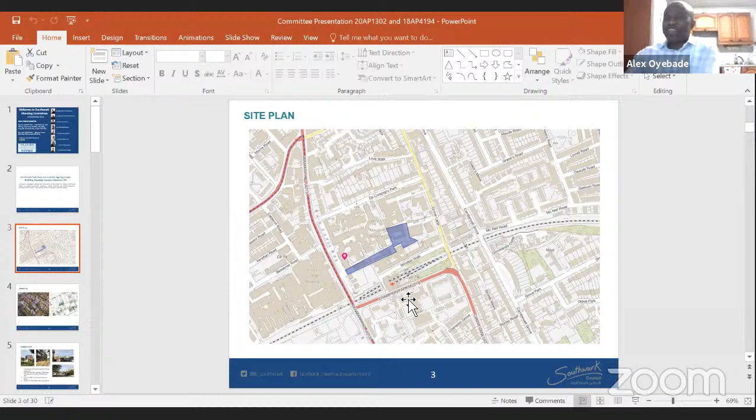So basically, from Denmark Hill, if you look towards the southwest end of the site, that's where the car parking area is. On the bottom left, below this building, is where the existing car parking area is, and that will represent the holding area for the vehicles that will service this site. Once they are called upon, they will deliver to the site there.

Then they will go through Windsor Walk to the right, to the east, and then turn left on Grove Lane. In the middle there, before they hit De Crespigny Park, there's a middle point where they will turn left.

Onto the side between the school and the existing hospital building, they will turn left there, westwards, from Grove Lane, and then go through the internal route of the site north to exit onto De Crespigny Park, and then turn left onto Denmark Hill again, and leave the site from there.

Okay, thank you, that's much clearer now, much clearer. Thank you very much indeed.

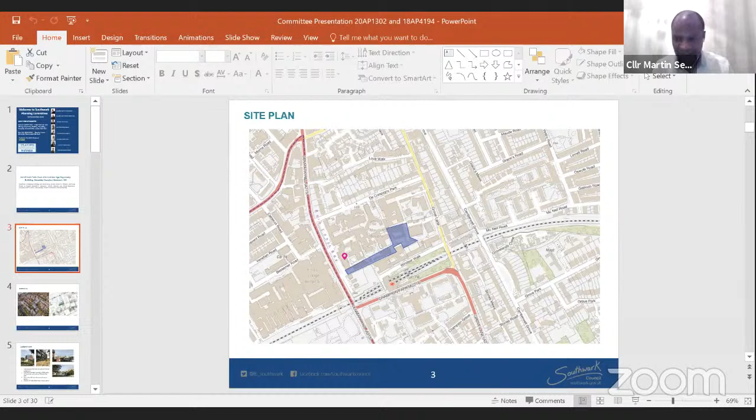Councillor Whittam, is that clearer? Yes, so there won't be any backing and three-point turning.

And is the school going to be hoarded off? Is there going to be a hoarding separating the school from the building site? Yes, Councillor, the building site will be hoarded off, so basically they have a dedicated pedestrian route on the eastern side of the route anyway.

So the construction site will be hoarded off, so they wouldn't have any contact with the school at all - it'll be completely separated. Okay, thank you very much indeed, Councillor Britton, for your question.

Are there other members with questions? I believe that question and answer session, Councillor Burgess, if you're still there, I can see you - responds directly to your concerns.

Would you agree? Sort of, yes and... No, I feel like it would be good to really see the detail on the traffic management plan that has been accepted, and it would be really useful to understand if there are any constraints around delivery times, so that all of that construction piece is really managed and rationalised in the most tight way possible.

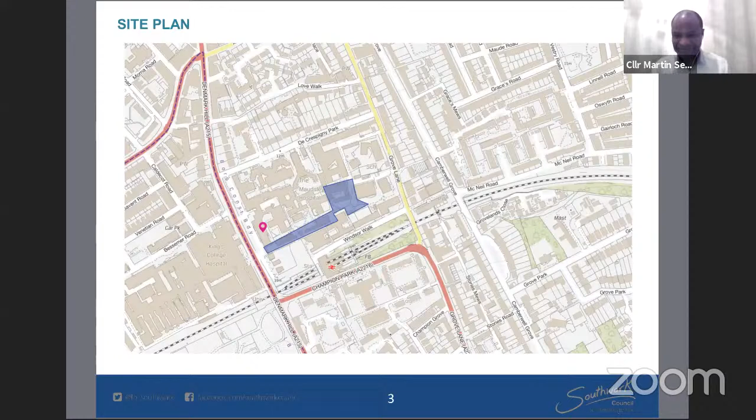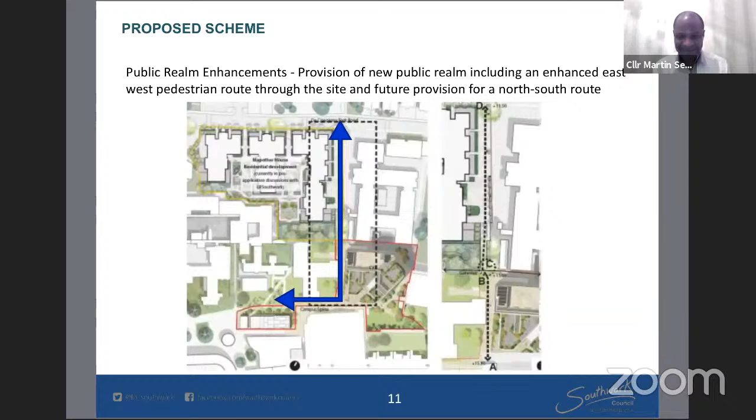And I suspect you have a plan B, of course. Do I have a plan B? Oh, I find in life it always helps. Oh, my iPad. Ah, it's going to work. Righty. I share your... oh, there you are. It has worked. There you are. There you go. Okay, just... There's always a slight delay. Oh, there we go. There you are.

First of all, I would like to draw members' attention to the addendum matters in respect of this item. It's noted that two further letters were received following publication of the reports. There are some clarifications and corrections to the reports, including the provision of additional conditions.

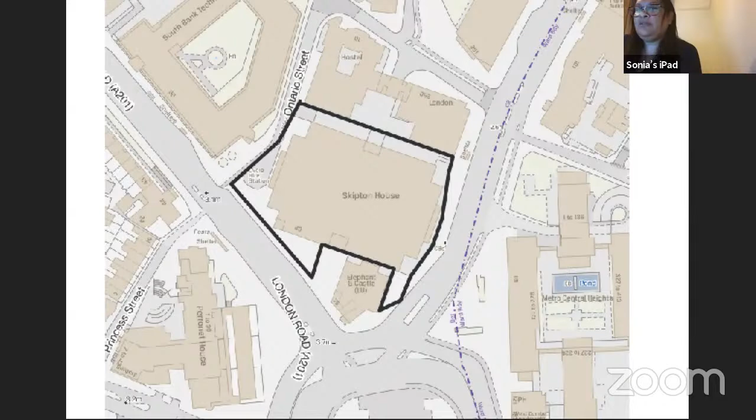The building is located in the centre of Elephant and Castle Central Activities Zone, north of pedestrianised Elephant Square. The site is situated immediately to the rear of the Elephant and Castle Bakerloo Line Underground Station, fronting London Road to the southwest, Ontario Street to the west, and Newington Causeway to the east. Immediately to the rear of the existing building and adjacent to the north boundary is the Perry Library, and beyond it the newly constructed 251 Southwark Bridge Road, former Eileen House.

The current building is a modern early 1990s, six-storey plus office block, currently occupied by the NHS, who have a lease arrangement which expires in December 2021. The site is in a highly accessible public transport zone and is in PTAL 6.

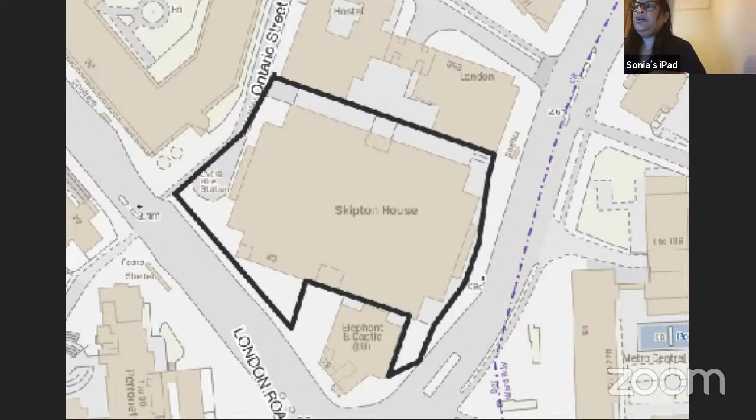The proposal is for the provision of six additional storeys as well as the part demolition and recladding of the existing building, to provide a gym, shops and central atrium entrance to the ground floor, with office space on the upper floors.

The proposed development would result in an uplift of 21,375 square metres of office floor space, with a total provision of 41,625 square metres, as well as the provision of retail and gym space on the ground floor.

This is supported in local and regional planning policies, which encourage the provision of employment uses within the CAZ and close to existing public transport infrastructure. The proposed increase in office floor space would make a significant contribution towards regeneration of Elephant and Castle as a town centre and employment destination.

The application will provide 1,720 square metres of affordable space, which would equate to 9.8% of the uplift in GIA. This would be provided as a combination of office and retail space.

883 square metres of affordable office space would be provided as a flexible area at first floor level. This would be capable of being subdivided into a number of small or micro units. Rental terms would be 70% of the market rent for the space.

The applicant estimates that a full market rent would be £50 per square foot. 70% of the rent would therefore equate to £35 per square foot. A rent-free period of 6 months would be offered to incoming tenants. The retail space would be provided as 5 retail units facing London Road.

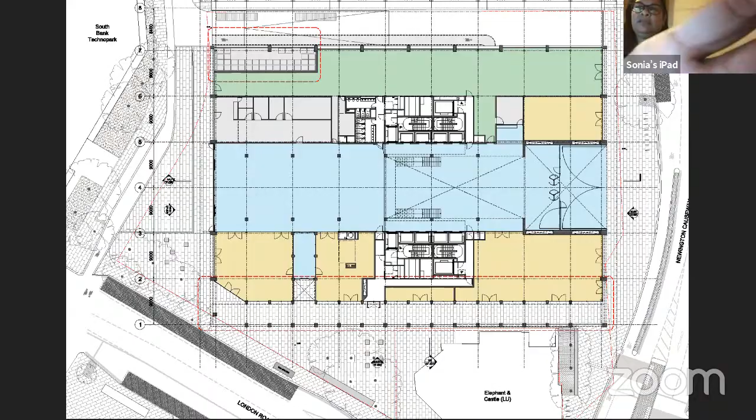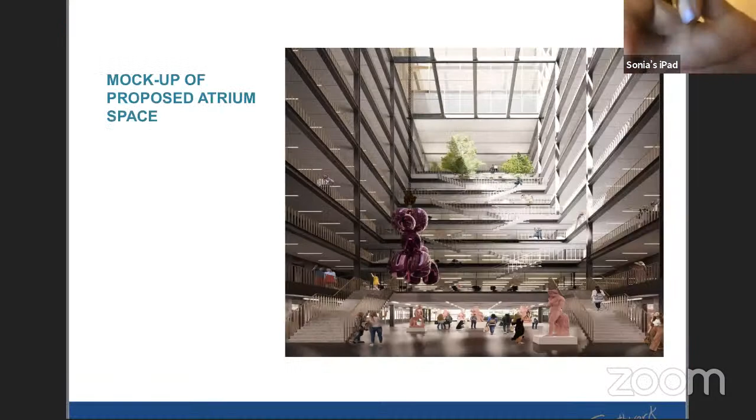The development, just go to some of the images, which shows existing. This is the atrium image, and that's the sort of main elevation image.

Officers are satisfied that the proposal is of the highest architectural standard. Furthermore, the proposal provides an appropriate response to context and would not result in harm to the character or setting of nearby conservation areas or listed buildings.

Careful consideration has been given to the impact of the proposal on residential amenity, and it is not considered that it will cause substantial harm such that would justify refusal of the proposal. Overall, the scheme would offer many benefits to the area, and subject to conditions and the Section 106 agreement, it is recommended that planning permission is granted.